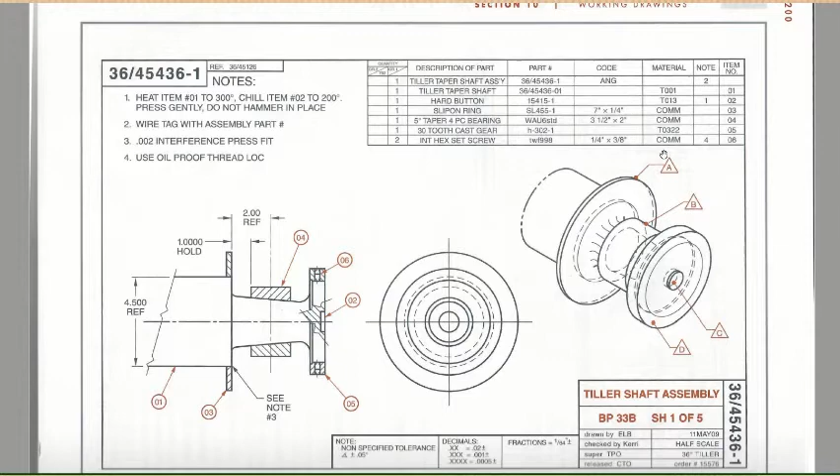So let's take a look at this and see what's going on with it. So let's check our title block first. Tiller shaft assembly, BP 33B, sheet 1 of 5. Then we have a part number down the side. So this is the part number for our whole assembly. And we know that because if we took a look up here, tiller taper shaft assembly part number, it's shown here. Drawn by, checked by, released, all of that information.

We have half scale, we have an order number, a tolerance for fractions, a tolerance for decimals, a non-specified tolerance on angles, which would be plus or minus 0.05 degrees. We have a couple of notes. Make sure you always read your notes. Then we have an isometric pictorial view of the part, so 3D drawing of it. We have a front view and a left-hand side view.

On the pictorial, we have callouts A, B, C, and D. But if we look at our bill of material, we don't have A's, B's, C's, and D's. We have item numbers 1, 2, 3, 4, 5, and 6. So over here, items 1, 2, 3, 4, 5, and 6. If we were trying to figure out what pieces they're talking about for A, B, C, and D, let's figure out what item A is.

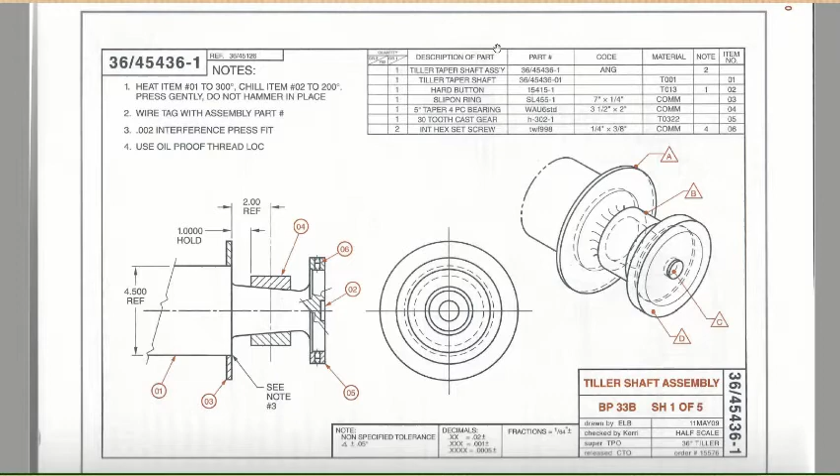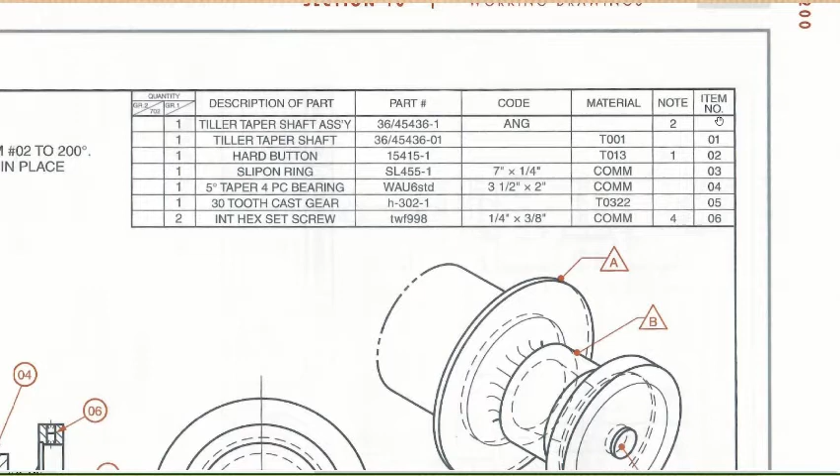Let's look at the bill of material though for 1 second. Okay, so on our bill of material, we have our quantity, description, part number, code, material note, and item number. Look at this very first line in your bill of material. There's no item number. That's because this first line is the top level of our bill of material, and it's the whole assembly altogether. So our assembly is made up of items 1 through 6. So shaft, button, ring, bearing, gear, and screw.

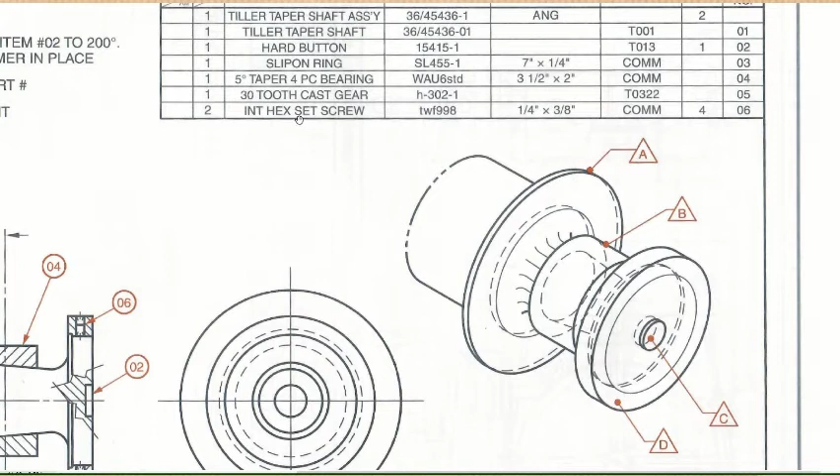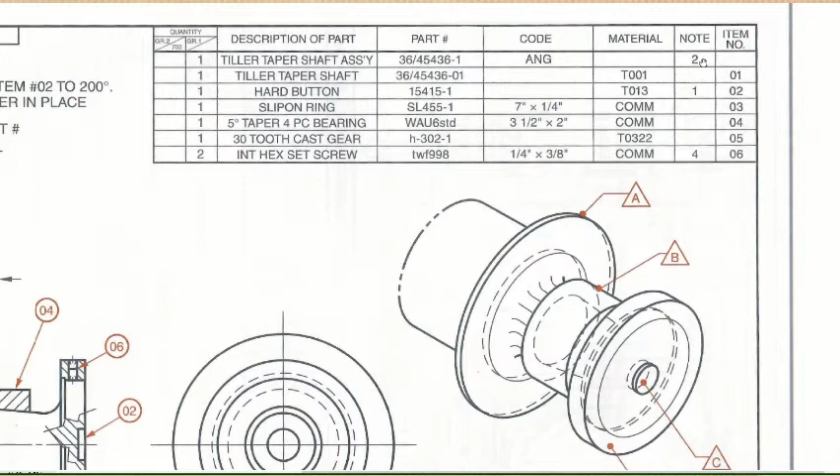We can see that items number 1 through 5 each have a quantity of 1, but item number 6 is a quantity of 2. So 2 hex set screws. We can see some things have a material note on them. So the shaft, the button, and the gear all have material notes on them, but the ring, the bearing, and the screw all say commercial. So the button has note 1, the shaft assembly has note 2, and the screw has note 4. So note 1, note 2, and note 4.

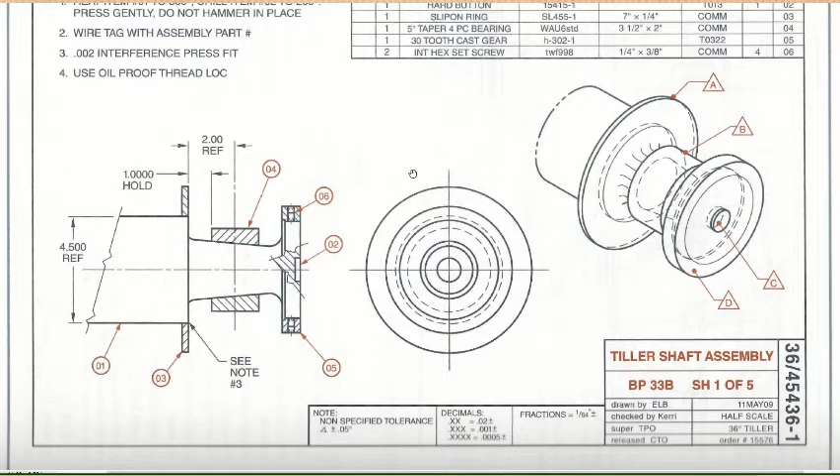But then we have a note 3, 0.002 interference press fit. So here, note 3. So it's saying that item 1 and item 3, so the shaft and the ring, are to have a 0.002 interference press fit. So that's how they end up being joined. So sheet 1 is our assembly drawing.

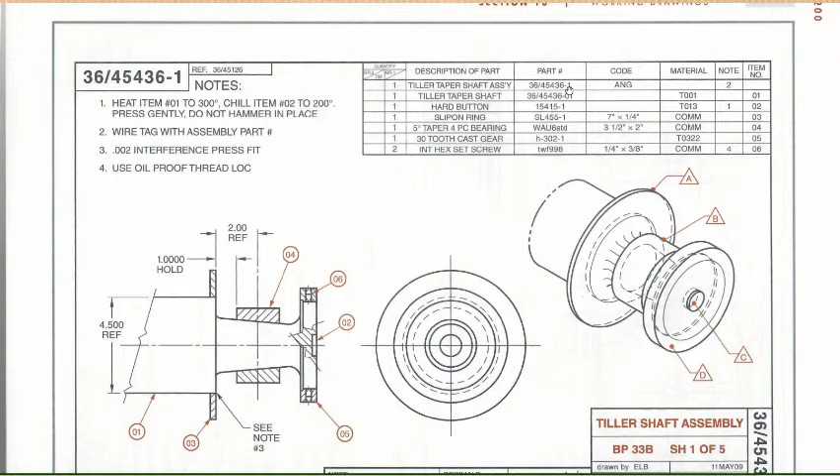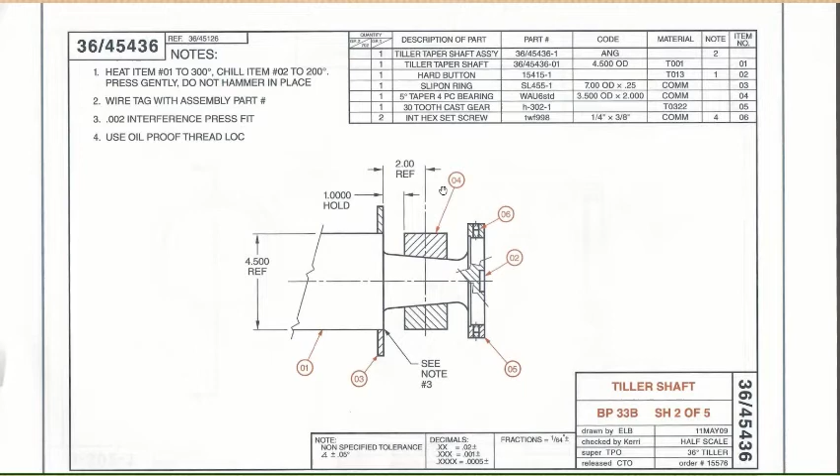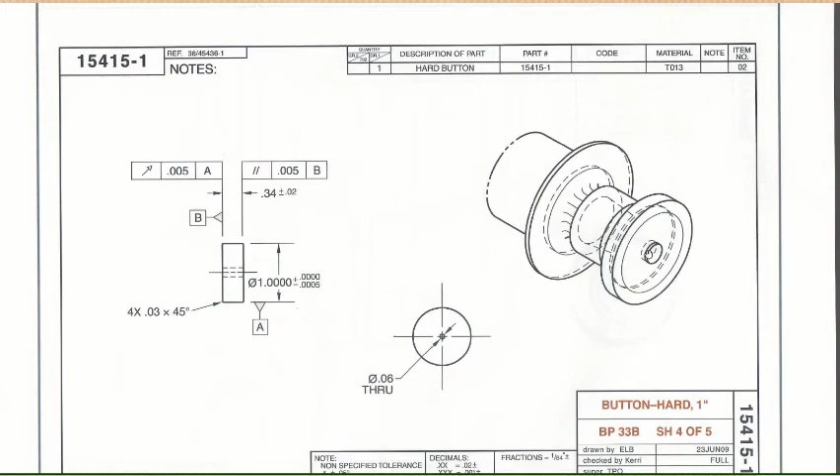Our third sheet is a drawing of the gear itself. Sheet number 4 is that button that's installed on the front. And sheet number 5. Sheet 5 is going to give us some information about finishing the part.

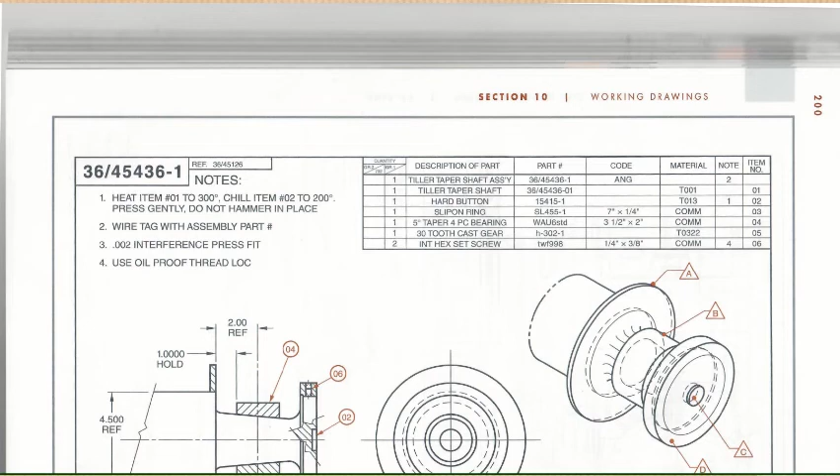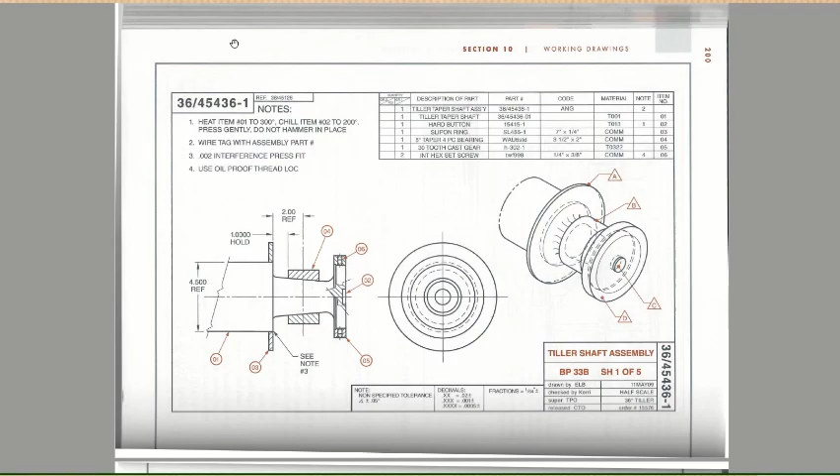Okay, so when you go to do the questions in your workbook or your handout, you're going to be working with sheet 1, the assembly drawing. So using that assembly drawing, you can go ahead and answer your questions in the workbook on the tiller taper shaft assembly drawing. And that concludes our review of the tiller taper shaft assembly drawing.